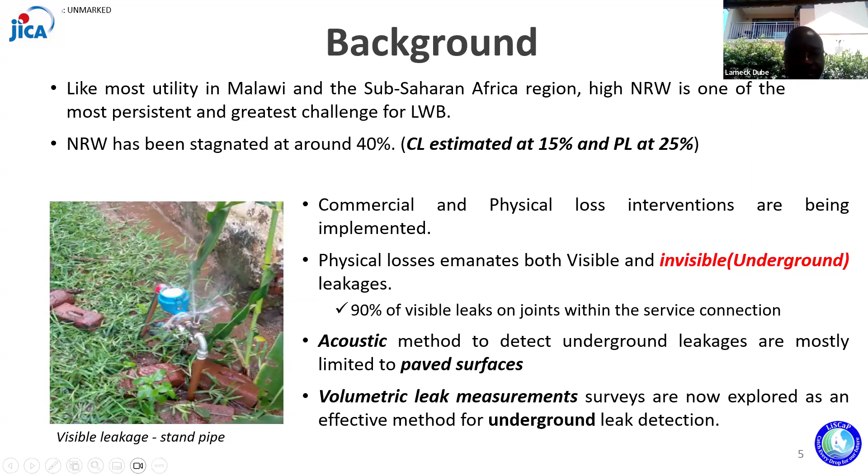So this study we did to assess. The main objective of the study is just to assess the effectiveness of volumetric leak detection survey, so that we can be using these methods in our distribution system to detect the underground leakages.

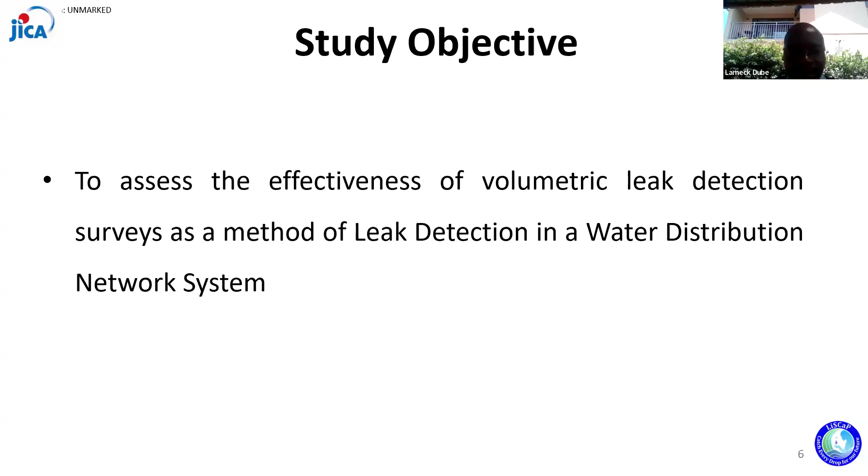Continuing with the methodologies, first we do the minimum night flow.

After subzoning, we did our first minimum night flow to understand how much water is going to respective subzones. After doing this, we understood that subzone number 4 is where we recorded the bigger flow, so we prioritized subzone number 4 for our leakage detection activities.

After we did the visible leakage detection activities in subzone number 4, we repaired all the leakages and said we have managed it. Then we came back and did the second minimum night flow measurement, because we were hoping these activities would manage the leakages.

We went back using the same procedure for minimum night flow measurement. Instead of the flow reducing, we found it increased from 5.79 cubic meters per hour to 9.79 cubic meters per hour in subzone number 4. That's how we managed it.

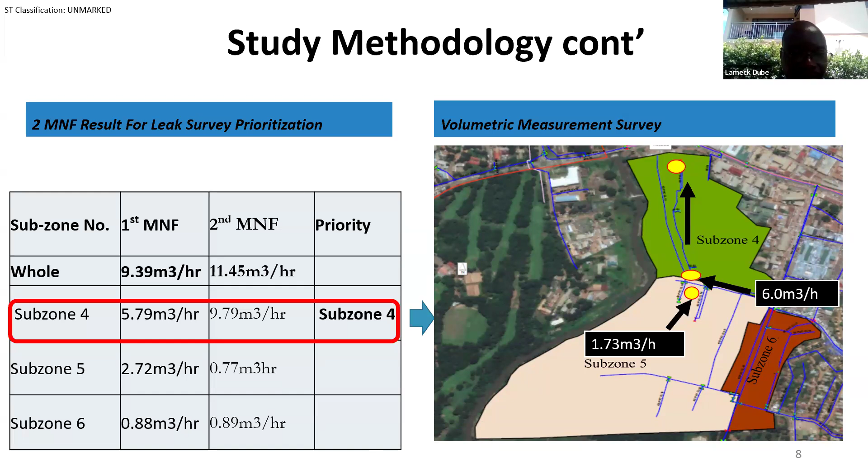Yeah, so these were our findings. We realized that in subzone number 4, we're having the bigger flows. Now we went to check, using the volumetric survey to measure line by line to understand where the bigger flow is going. Then we found that in this particular subzone, we had an underground leakage.

Then we understood, we chased the whole line. After chasing, we found that there was a line, just at the end, where the pipe was faulty, and it was leaking all day, night and day, night and day. Then we did our repairs on this particular line.

After doing the repair, we went again and did the minimum night flow measurement. We found that it had dropped. We realized that this was the one taking a lot of water, because it was just leaking, like an open hose pipe, just going to the drain. We found that the minimum night flow dropped from 9.79 to 6.53. Yeah, so the next slide.

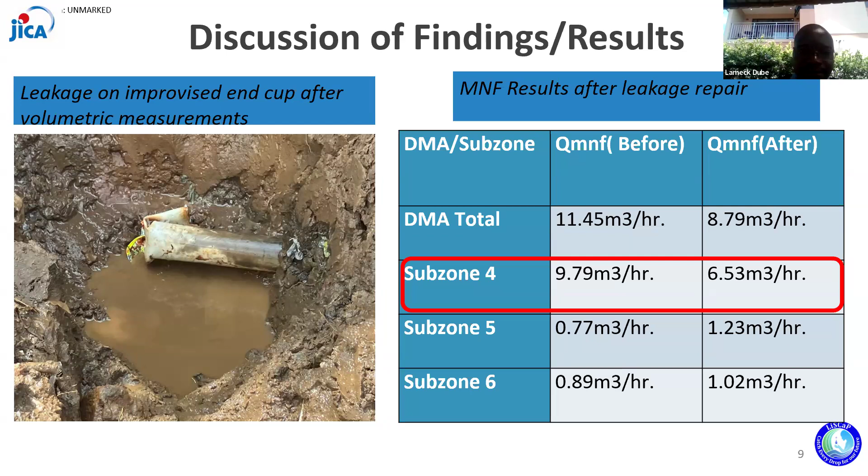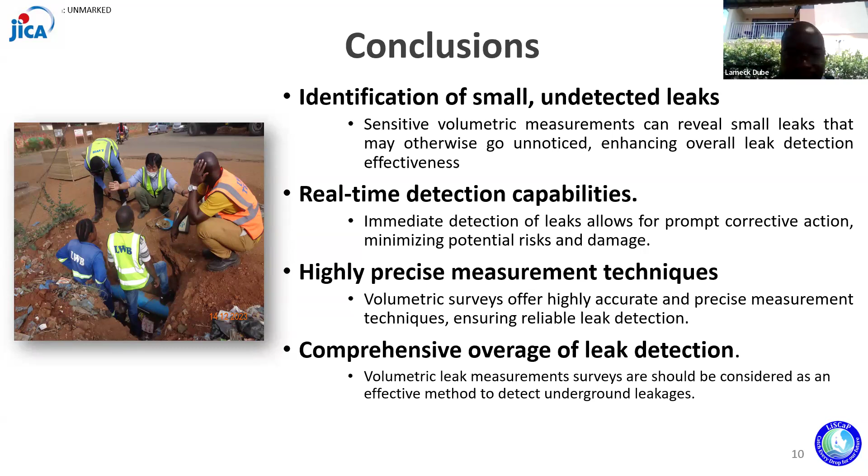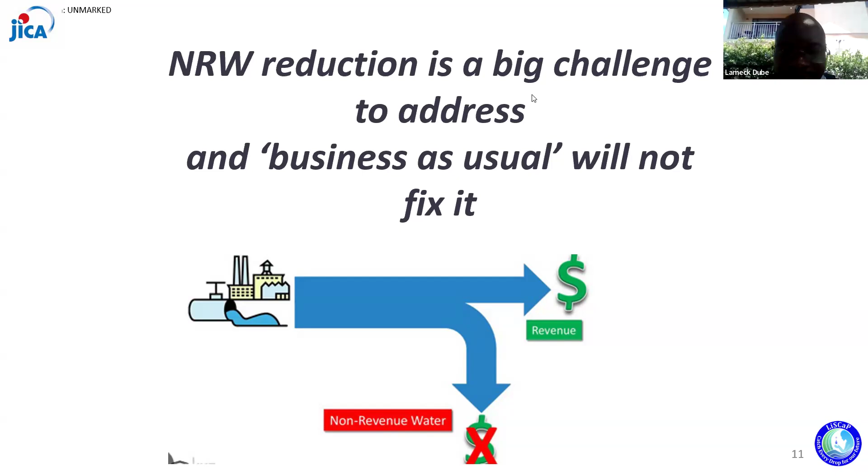Thank you, Lameck. That's a wonderful case study, and a really good example we can give to new technicians or people who have been in the industry for a while, of breaking down your zone into different sectors, DMAs and subsectors. That's excellent, and we've got some questions about that afterwards. If anybody has any questions, please write them in the chat. We're going to move forward onto a slightly different project now, but again metering being a real key part of it. We're going to go on to James Howard. If you could just introduce yourself, James, and give us a bit of background about your project and take us through it.

Thank you, Michael, and thank you for the invite to speak today. My name is James Howard, and I'm a Leakage Optimisation Manager at Welsh Water. My overarching remit at Welsh Water is around the targeting and reporting of leakage, and I mainly work on projects which feed into the water balance, around leakage, metering, pretty much source to tap. So the topic I'm going to speak about today is customer meter performance, or micrometers as they're referred to sometimes in Africa, and the potential impact on revenue and non-revenue water. I'll run through a bit of background quickly around the overall project, and then go into the specific study. So next slide.

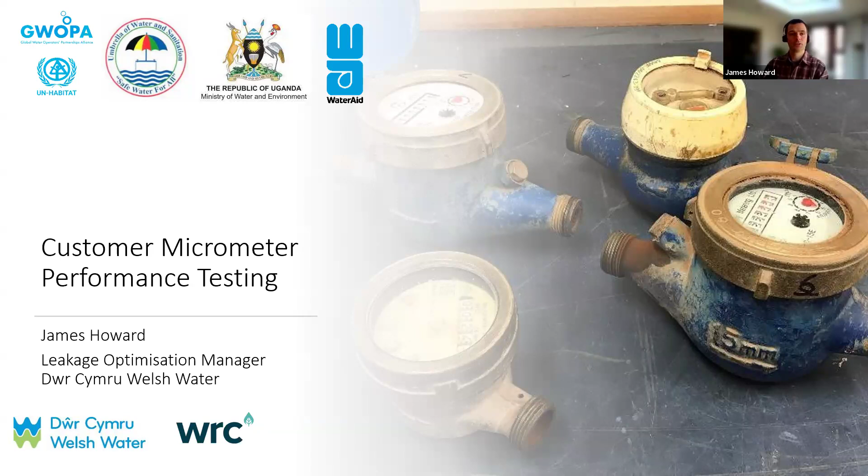So the project I've been involved with in Africa is funded by the EU, the European Union, and managed by the UN Habitat's GWOPA program, the Global Water Operator Partnership. The GWOPA program focuses on supporting water operator partnerships across Africa, Asia, and Latin America, with the goal of improving water and sanitation services through peer support and capacity building. This specific program is a partnership between Welsh Water, the Eastern Umbrella in Uganda, and WaterAid. The aim is to help the Eastern Umbrella transform 3 schemes in Eastern Uganda, Buyende, Namutumba, and Namayingo, into best practice models of sustainable water operations. These schemes will then be used to benchmark other schemes both in the region and across Uganda. Next slide.

As part of the project, there are key result areas and cross-cutting areas. I'll call out a few of the key areas of the project which I've been involved with. First, improved asset management, which will focus on improving asset management data collection, processes, and information systems.

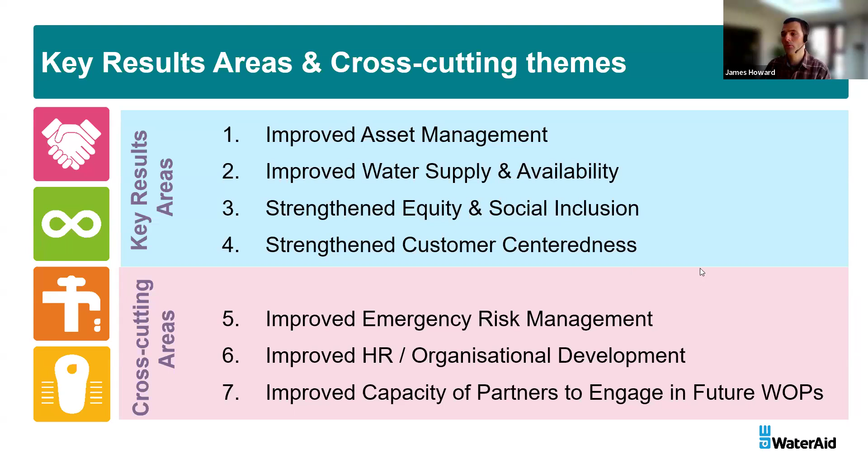Got a few photos to go through. Just for background, some typical scenes in rural Uganda. The photo in the center is a typical shallow well, which is used by individuals that don't have mains water.

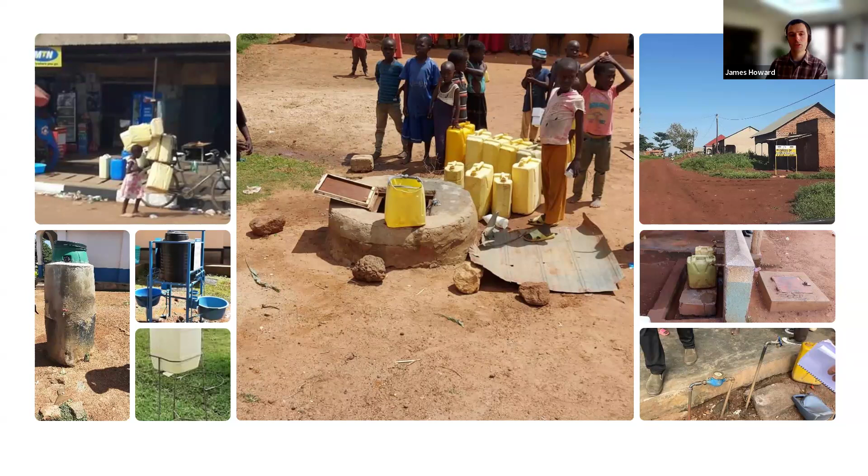They're sometimes referred to as shadoofs, and they are shallow wells abstracted by using basically a container on a string. The risk around those is obviously contamination from surface water and latrines which are sited nearby.

You'll see the yellow jerry cans, which are pretty much everywhere in Uganda, and you often see women and children walking long distances across roads to fetch water.

In terms of the piped water system, the bottom right two photos show a typical arrangement. The one in the middle right is a water reseller. There's a number of taps fed via a meter, and then a reseller, usually a small shop, will charge consumers for filling containers.

The bottom right is a typical private standpipe, which has an above ground meter and then a tap, which is used for filling containers.

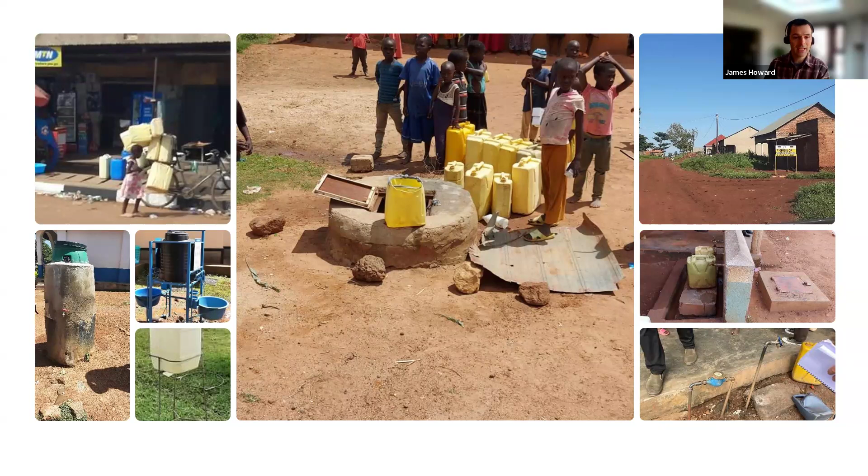A small stat for Uganda: one cubic meter of water within this region costs around 3,014 Ugandan shillings, which is about 63 pence per cubic meter. The average consumption is about 4.4 cubic meters per month per connection.

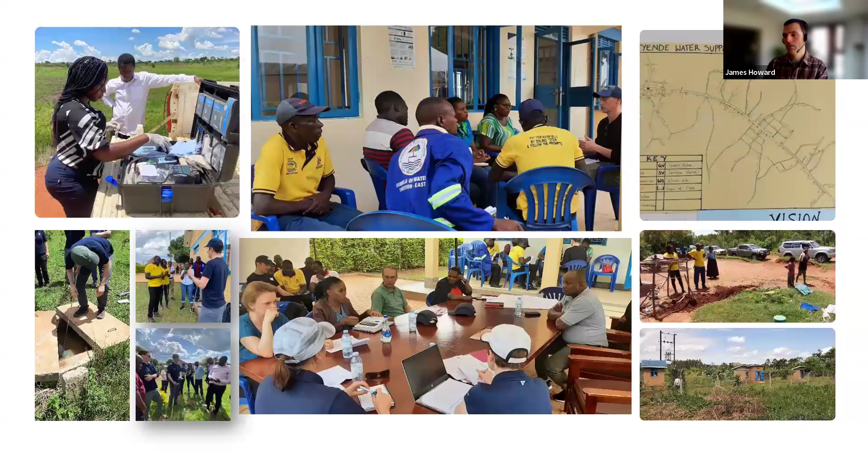A couple of photos from some of the fieldwork carried out as part of the partnership. The photos show some water quality testing training and leakage detection training being done on site, and the top right is the start of network digitization.

That's a hand-drawn map, but as part of the project, we've fully digitized all of the zones and created a GIS system through mWater.

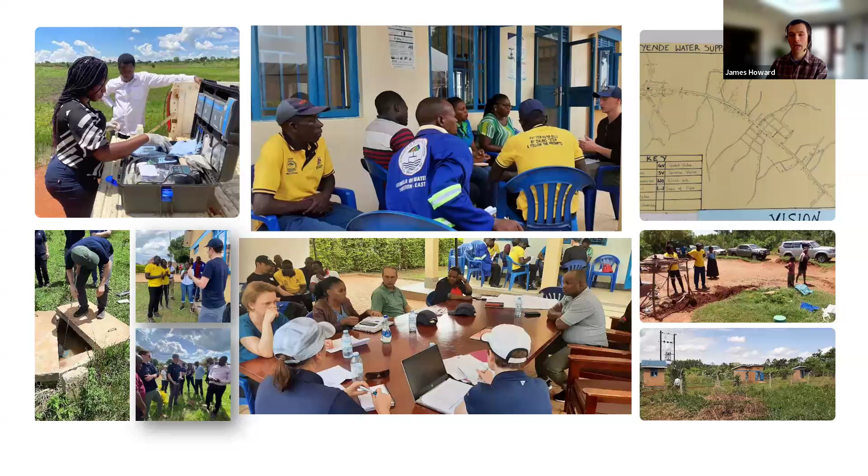On the first visit to Uganda, one key observation we made was the variety of different types, ages, and condition of customer metering.

On the first visit, we took the opportunity to proactively remove a sample of meters and get them tested back in the UK. The aim was to investigate performance and suitability of current revenue meters and understand the potential impact on revenue and the water balance.

As an output, we wanted to provide guidance on the associated apparent loss estimates, meter reading, meter inspection, and meter testing activity, and to inform future meter specification.

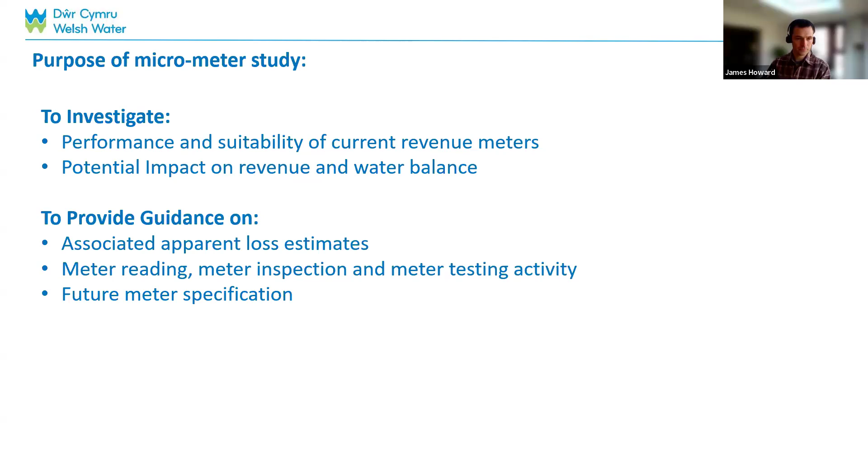Going into the testing, there were four main tests and assessments we wanted to carry out. The first was a standard range of tests recommended in BS 5728, but with additional test points added to gain a detailed picture of accuracy across extended flow range and water use scenarios.

Number two was to understand the MER associated with water container filling scenarios, because the majority of rural supplies comprise an above ground tap and standpipe used for filling containers. We were keen to understand meter performance under those scenarios.

The third test was an assessment of the starting and stopping flow rates, again to understand the impact of small leaks or container filling at low flow rates.

Number four was a specific assessment of the standpipe arrangement to understand if the 90-degree bends near the meter have an impact on performance.

The testing was carried out at the WRC facility in Swindon, England, in the UK, and we used their small testing rig, which is UKAS accredited and uses a calibrated weighing scale system as a reference measurement.

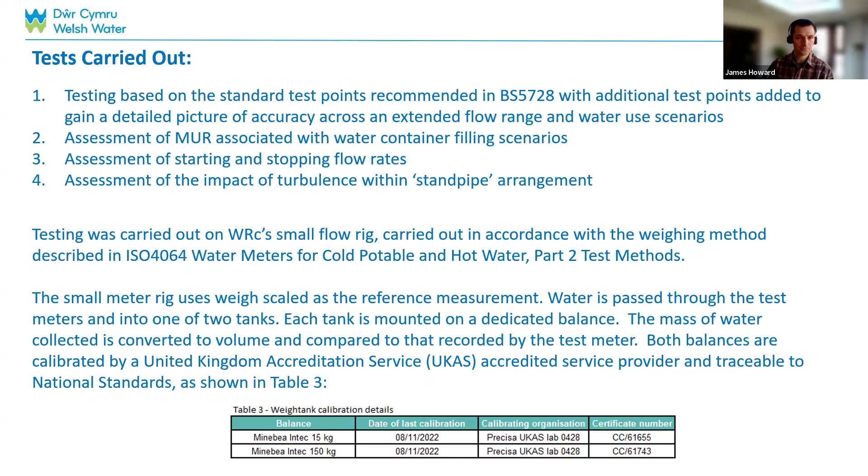As mentioned in the previous slide, we removed a sample of in-service meters. All of the meters that we removed were of multi-jet or single-jet type and were a mix of wet and dry register types. All meters were either Class B or Class 2 specification.

Upon visual inspection of the meters that we removed, it became clear that only a small proportion of the meters actually carried any type approval markings. One of the multi-jet meters had CE and M marks, which show that the meter had been certified as meeting the requirements of the European Measuring Instruments Directive and had been approved for revenue use in Europe. The M mark showed that it would have been verified before leaving the factory. The only other meter was a single jet meter, which had a type approval number and an initial verification mark. All other meters did not contain those type approvals.

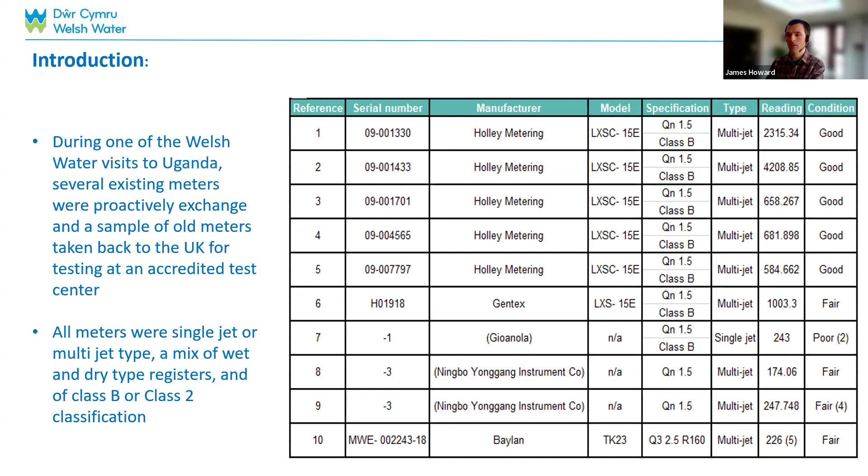Going into the testing, apologies for the busy slide, but I'll try and summarize it. The first test we did was on the standard test points recommended in BS 5728, but with extended low flow and high flow test points to cover the full Class B and Class 2 specification. We did use the in-service limits set out in Annex C of ISO 4064 for scoring the meters. Specifically, the tolerances state that in-service meters should comply with plus or minus 10% between the Qmin and the QT transitional, and plus or minus 4% between QT and Qmax.

In terms of results, although all meters were within the expanded error limits at medium flow rates, only 2 of the meters that we tested were fully within the expanded error limits over the full range of flows. I've put some red dots on the table just to highlight where the worst performance is. You can see that the worst performance is clustered around the very low flow rates and the very high flow rates.

All of the meters tested did seem to suffer from under registration at both the low flow rates and high flow rates. One key observation that we made as part of the initial test was the significant under-recording that we saw at very high flow rates, and we deemed that that's most likely due to the slippage in the magnetic link between the measurement chamber and the register of the meter. Another possible cause is stalling of the impeller within the meter caused by an imbalance of the impeller or turbulence within the meter. Next slide.

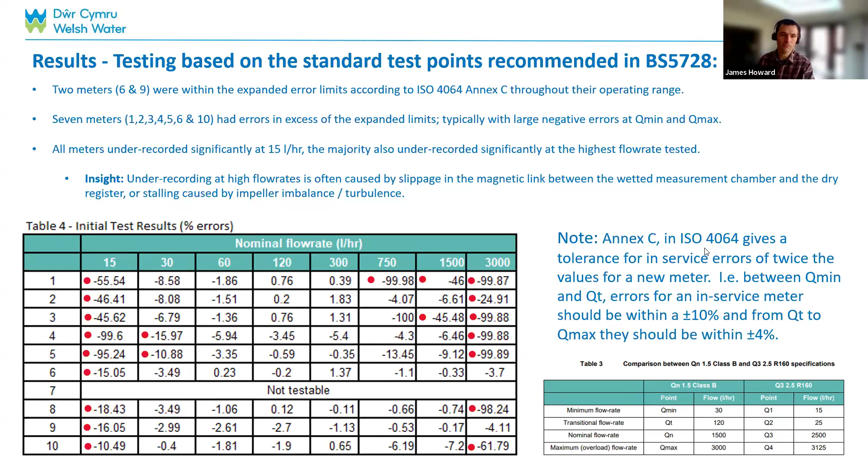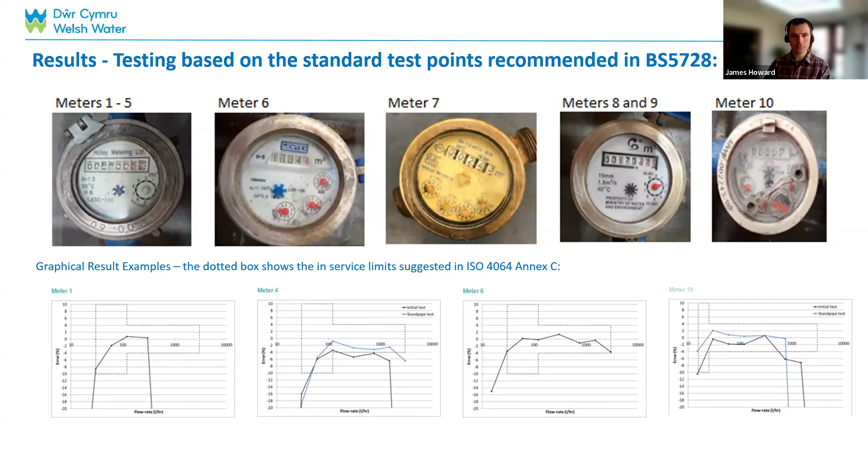This was quite interesting, and we considered the impact of this around container filling. Although it would be unexpected to see flow rates as high as 1,500 litres per hour being used for container filling due to splashing and the uncontrolled nature of that type of flow rate, it is conceivable that we would have flow rates of around 750 litres per hour. Therefore, there is a risk that under those specific scenarios, meters of that type would significantly under-record the volume associated with container filling.

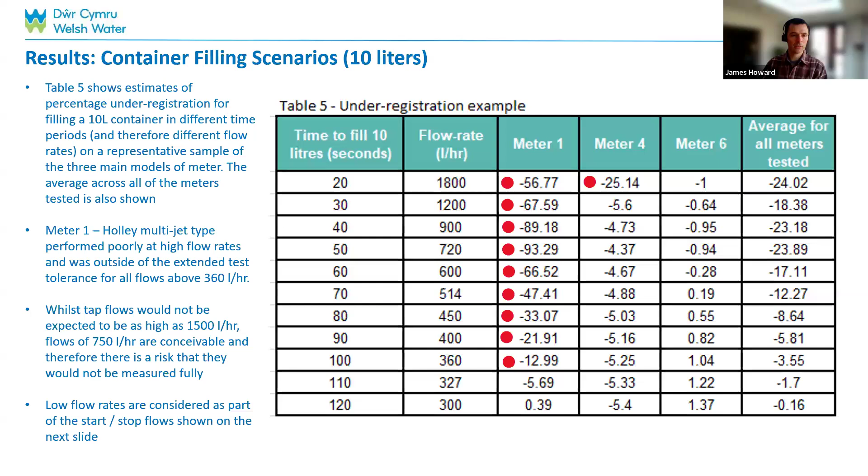On the next slide, we also looked at the starting and stopping flow rates of the meters. The test rig was run at an increasing flow rate until the meter started to record flow, and then again at a decreasing flow rate to observe when the meter stopped recording completely.

The main insight we took from this was that there is a risk around small leaks at the faucet being under-recorded, and also that container filling, carried out at very low flow rates, would not be registered.

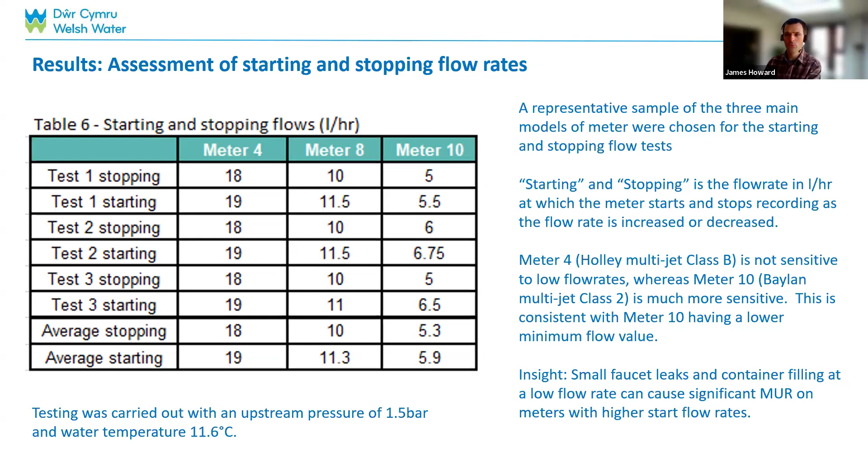In summary, we found that the standpipe configuration did have an impact on the error curves for all meters tested. However, the impact was not consistent for all meters.

For meter number 4, the results were consistent with the initial testing, so the standpipe made no difference. For meter number 8, the errors increased in the negative direction, though not significantly, and remained within the expanded limits for in-service meters.

However, for meter number 10, the error curve moved upwards and performance improved in the low to mid range. The standpipe arrangement actually improved the error at those low to mid ranges, and the errors are well within the expanded limits for in-service meters.

However, for meter number 10, at the high test point flows, the under-registration increased significantly, and the meter recorded very little consumption at those higher flow rates. In conclusion, it was very clear that the turbulence caused by the 90-degree bends can impact different meters in different ways, and the impact is not consistent.

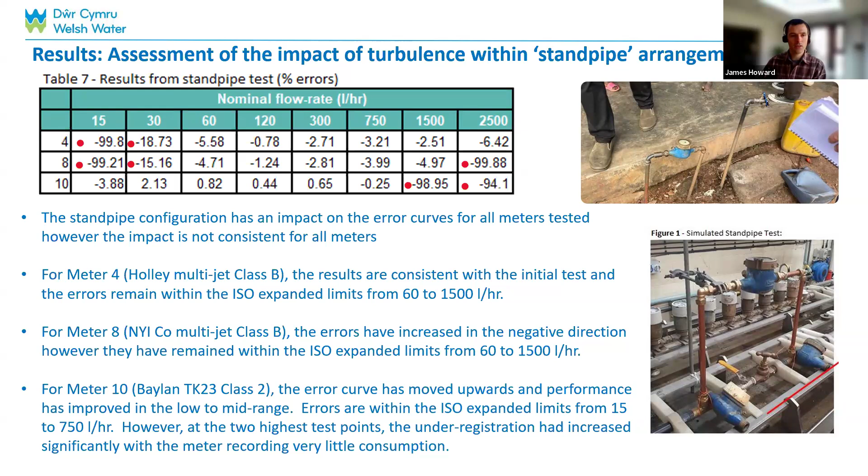The next two slides were not specifically part of the testing we carried out at WRC, but came from observations and investigation as part of the fieldwork on site.

The first is around meter tampering. While on the ground, I had the opportunity to speak to some plumbers and site workers about the different ways meters can be tampered with and what they'd actually seen. These include temporary removal of the meter by a customer, a hidden bypass, and meter reversal - physically removing the meter, rotating it, putting it back in spun backwards, then reversing it again to cause the meter to under-record.

Another type is physical mechanism removal or modification. On wet-type impeller and register meters, there was evidence that customers had physically removed the entire mechanism for a period of time and then reinserted it at a later date.

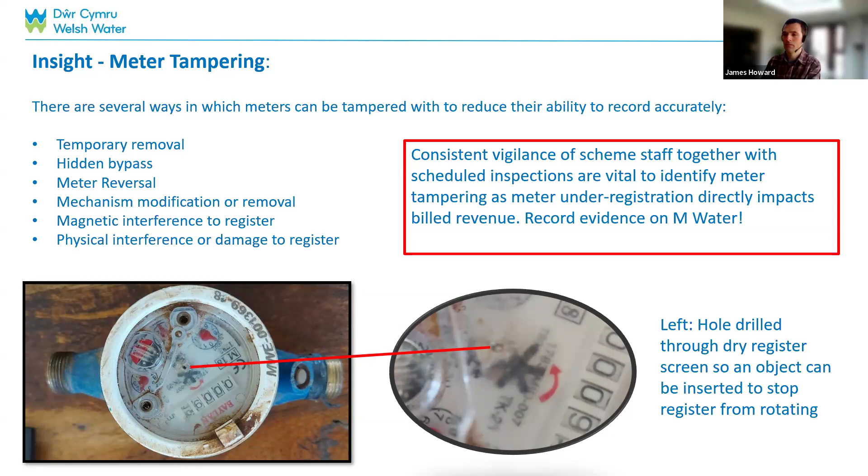The second area was exploitation. Again, from insight gained on the ground, especially with very old, basic types of meter, scheme staff observed this sort of exploitation behavior occurring, whereby containers were filled at a very low flow rate, below the starting flow rate of the meter, and secondly at a very high flow rate while observing the rotational stop of the meter.

In terms of the key action around this, it led us to a key recommendation that future procurement should concentrate on good quality meters which have been verified to meet international standards and which have individual verification from the factory, specifically the procurement of meters with good high turndown ratios, which allow registration of both high and low flows.

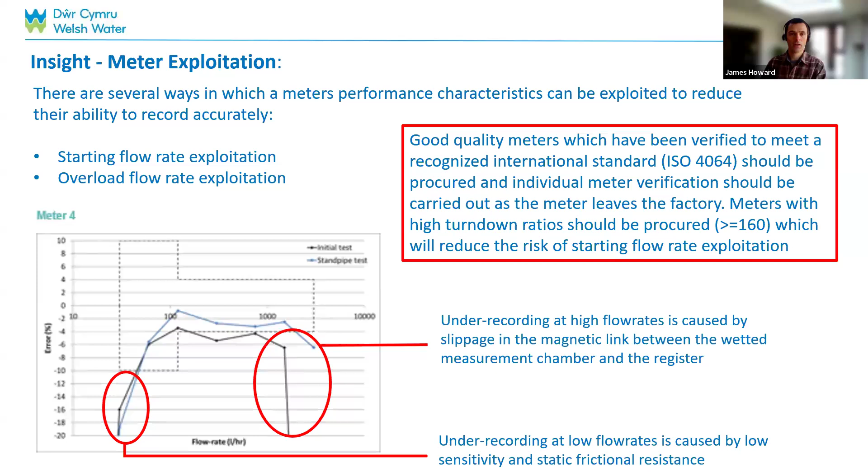In closing, in terms of conclusions and recommendations from the initial testing, we found that only 2 of the meters tested were within the expanded limits over their operating range.

Although most of the meters were within plus or minus 4% in a limited part of their range in the middle of the section, all of the meters tested tended to under-record, which is typical of wear in mechanical meters.

Under-recording was most significant at low flows, less than 30 litres per hour, and also at very high flows. The latter is most likely due to slippage in the magnetic link between the rotor and the register, or turbulence within the impeller itself.

From the test results, although it was a limited sample, it is likely that consumption is being under-recorded as a whole. An estimate of under-registration of around 23% was made, based on the container filling scenario. Obviously, more testing is required to bolster the sample and understand the full meter estate and levels of under-registration on different types of meters.

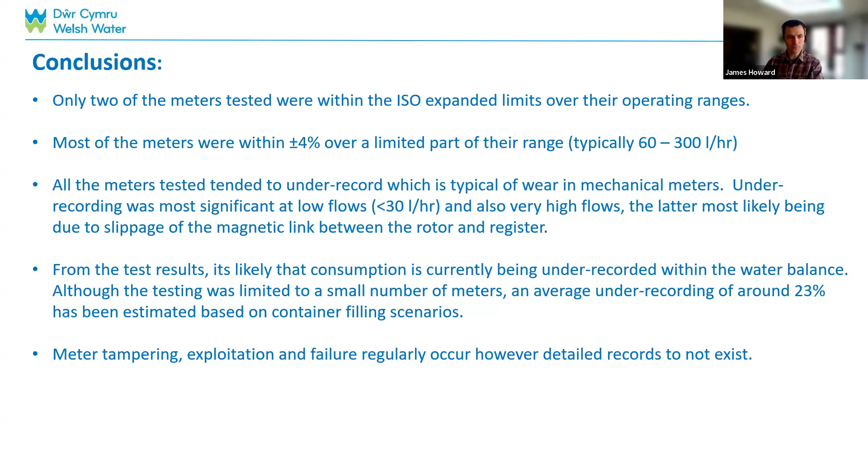So, high-level recommendations and actions. In order to improve estimates of non-revenue water and ultimately reduce water loss, it's necessary to have a good understanding of the amount of water being used. Reliable and accurate metering is essential to this. There are a number of recommendations and actions that we've set out and enacted as part of the project.

Firstly, meters should be procured to a good standard and a recognized international standard, such as ISO 4064, and should carry individual meter verification evidence from the factory to ensure that the meters are working as expected before they're installed.

The sensitivity to low flow rates was quite varied across the meters. So as a future specification, a minimum recommended standard has been agreed of a Q3 2.5 meters cubed per hour meter with a turn down of at least R160, which will be considered as part of future procurement types.

Also, the move to dry registers in all cases will be used, because it was noted that due to the above ground location, buildup of algae can occur in wet register meters, which from both a water quality perspective and a meter performance perspective is not prudent.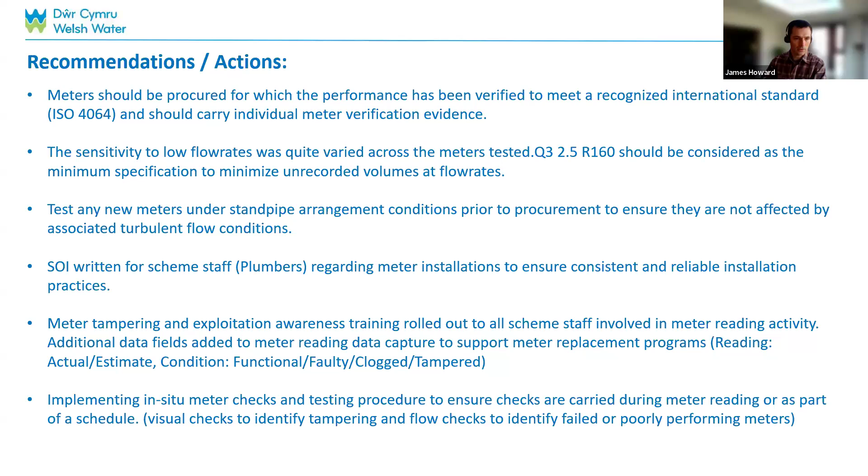And I think that is it. In the appendix is the recommendation for those in situ tests.

Thank you, James, we really appreciate that and your time putting that together. So we've got time for some questions. I'm going to start with Lameck first. Please write your questions in the chat. So Lameck, you've got some really good success there.

You found a fair bit of leakage there by doing your step test and using the metering. Is there an ambition to do more, to go forward and do it in different parts of Malawi?

Yes, there's an ambition, and that's what we are doing now. We are transferring this knowledge to the other zones, as I already indicated we have 3 zones. So we are prioritizing some DMAs. At the moment we have got 30 DMAs where we are doing these activities, both physical and commercial activities. When it comes to physical losses, we are also using this volumetric measurement survey to understand the underground leakages.

After repairing the visible leakages, if we see that the volume on the volumeter is not dropping, we understand that maybe it's the underground leakages. So we also use this method to understand the underground leakages in all our DMAs. As of now, we have got 30 DMAs where we are prioritizing to do these activities.

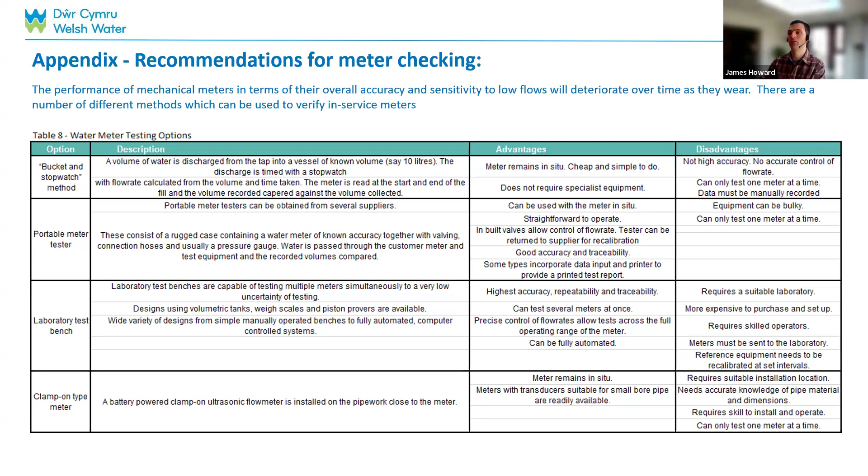In Uganda, the pressure does vary. The rural schemes are generally gravity fed, not pumped. They comprise a borehole or spring, pumped up to a high level tank, with some basic treatment, usually chlorine dosing, and then it gravitates from that high level tank into the network. There can be varying pressure, I think between generally 1 bar and 5 bar in the rural schemes, but it depends on the configuration and topography. There was no pressure management in the rural schemes, but it is something we've done some basic training on for awareness when they start to expand schemes, to think about the management of pressure.

Brilliant. This is the final question, and then we need to finish. Lameck, what was the non-revenue water percentage you had before and after you did this project? And have you got a goal of where you want to get non-revenue water to as a percentage?

Lameck, are you able to hear us? We're just wondering what the percentage of NRW was, before and after. Yes, I'm able to hear you. I'm trying to open a DMA balance sheet so that I can give you the real figures.

Yes, the percentage improved, because at the initial stage of the activity we had 53% non-revenue water in this particular DMA, but after the exercise it dropped to 20% of non-revenue water in this particular DMA.

Yes, we are trying to roll out to all the DMAs in our distribution system. That's what we are planning now, because we started some activity, but as I already indicated, at this point in time we have prioritized 30 DMAs. These DMAs have got high level water loss, so we are prioritizing in each zone. We've got 30 DMAs in total, because in our distribution system we have got 119 DMAs which are balancing. So at this moment we are targeting 30 as the starting point, whereby we are doing all the activities, the commercial activities and also the physical activities.